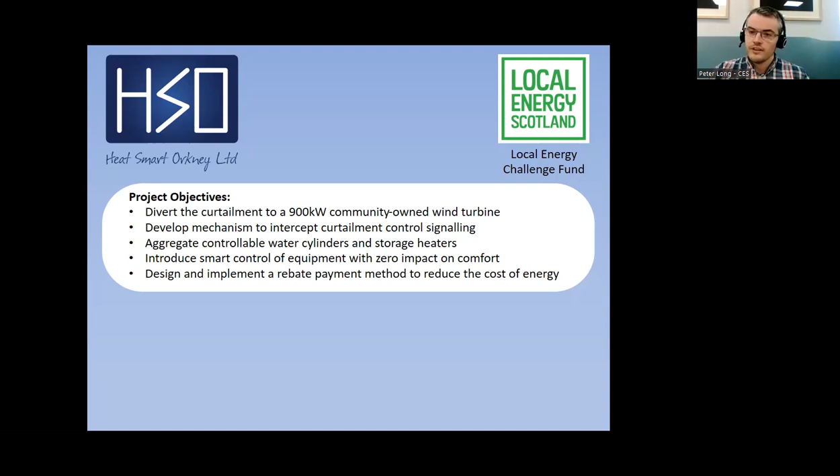So this was upgrading people's hot water cylinders to high efficiency Megaflo cylinders and putting in Dimplex Quantum high retention storage heaters as their secondary heating. We could charge these, with the idea being that the property's primary heating system didn't need to work so much. But since we were forcing these electrical resistive loads to turn on, the participants were compensated for the electricity forced into the property, rebated by first 10% and then up to 20%.

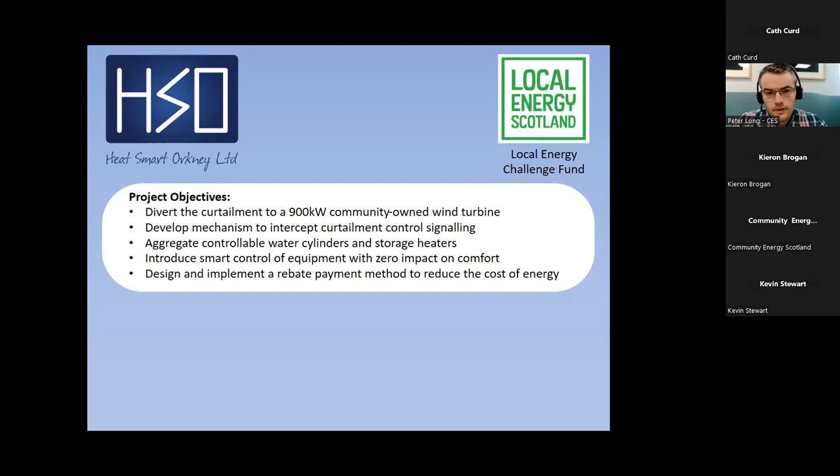The area I was mentioning is part of Orkney's active network management system, which was implemented in 2009 to allow more renewable energy to be connected to a very constrained grid. When there's not enough space on the grid, certain turbines in certain areas start getting turned off. So we could intercept those control signals, to start turning turbines off and turn on electrical devices at that time.

The project suffered from issues like internet connections - you need a very good, reliable internet connection to have optimum availability, so that was one issue. Another one was the equipment used to send control signals to each of our 70-odd properties was relatively new, bespoke equipment that had its own reliability issues, but there was certainly enough successful operation to prove the business model.

What I would say about the Heat Smart Orkney project, even though I would class it as a success, it ran for 2 years funded, but it was only possible through very generous capital funding from the Scottish government. So it would be hard to replicate, and you could argue it's quite a niche thing for Orkney-specific problems with grid constraints. But I do feel there's potential for it to be rolled out in the future when communications equipment and internet can be more reliable, and aspects of it are certainly replicable in other areas where we start seeing more constrained areas in the grid across the country. I do hope we manage to set this model back up again in Orkney in the future - I think it had great potential and serviced the community groups we were working with quite well.

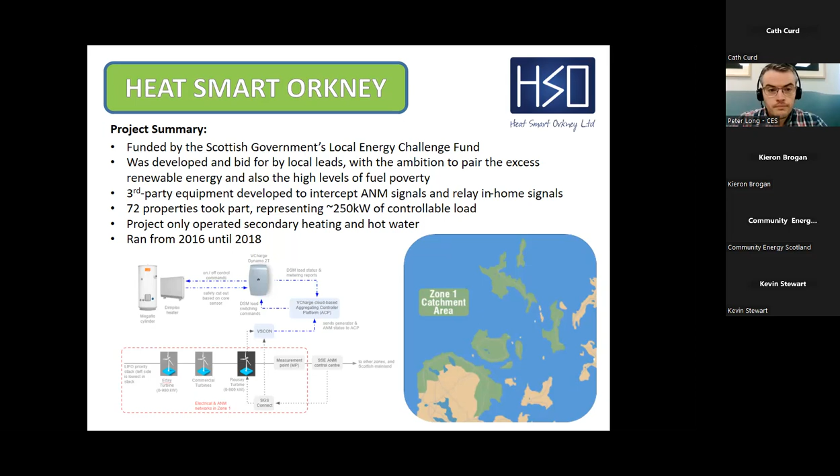I've already gone through some of the lessons learned, but one of the links that Cath's going to forward on to everybody is the final report of the project, and that's already available. If you just look up Heat Smart Orkney final report, you'll find it very quickly, and that provides a good explanation of the background behind the project, the rollout of the project, and the results and the lessons learned. So I would recommend, if you have any interest in similar community energy projects, it would definitely be worth a read.

So the Heat Smart Orkney project fed into the SMILE project, which was European funding. This time we worked with a large number of European partners to look at technical and non-technical innovation barriers and solutions. But here we were building upon the Heat Smart Orkney project I just described, where Heat Smart Orkney was looking at relatively simple resistive heating, whereas SMILE was trying to incorporate wet heating systems.

So air source heat pumps were our primary source of heating and hot water. And this was certainly a large learning curve locally for us at CES.

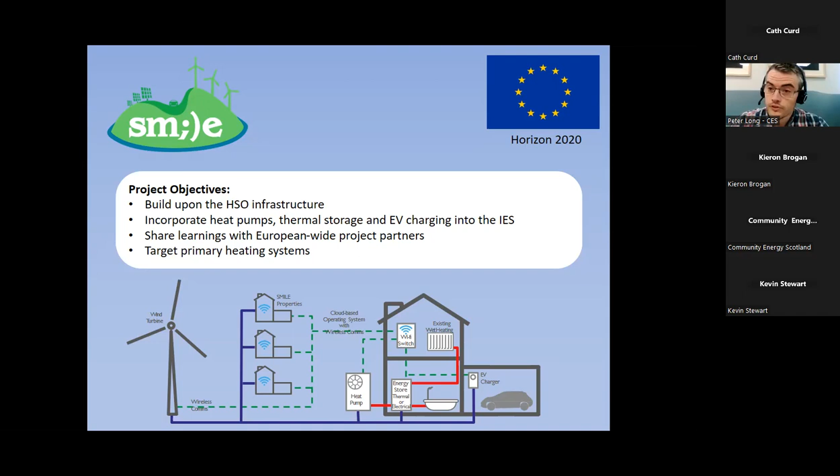I don't want to get too technical, and Cath tried her best to remind me that I shouldn't be assuming too much about everybody's technical experience, and I'm certainly no engineer, plumber or electrician.

So here I've just put in some pictures from some of the equipment that we installed, and we used the Daikin high temperature Altherma heat pump, because our technical partners had to pick a heat pump, and that's the heat pump we're integrating with.

They only had time and resource to onboard a single model, so it did restrict some of our flexibility in the properties we could enroll into the project, as the heat pumps were rated 11, 14, and 16 kilowatts, where a lot of properties in Orkney, even as cold and windy as it is here, some of them may only need a 6 kilowatt heat pump, and it would have been irresponsible to have put in such an oversized heat pump. So it was a bit limiting.

But yeah, we also installed lithium-ion batteries, again new hot water cylinders, and also paired with SunAmp just outside Edinburgh with their phase change material heat batteries, which are kind of a success story for Scotland, bringing energy efficiencies and new phase change material heat batteries to the market, which do offer higher energy densities and higher efficiencies, lower heat loss.

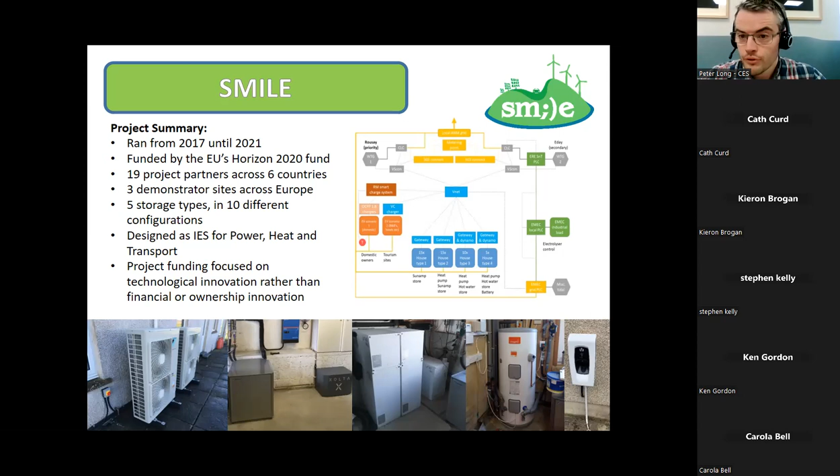So this was certainly a large impetus for CES to try and upskill quickly, and a lot of our learnings came from problem solving there. But yeah, lots of successes.

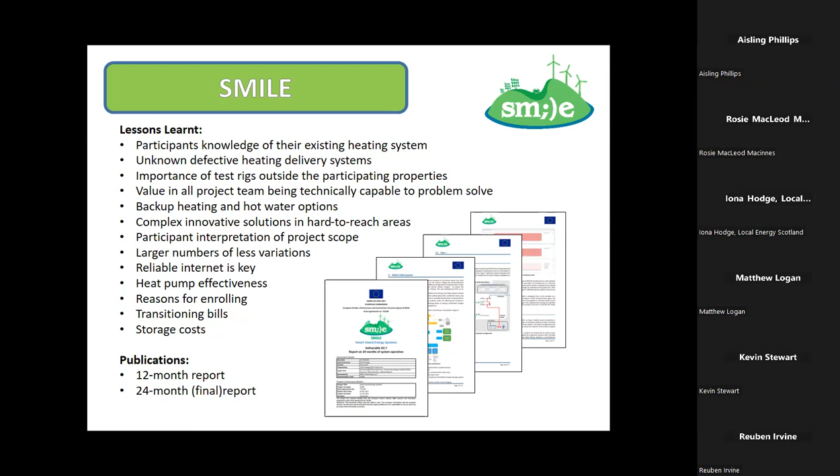But again, some of the lessons learned from the project were, again, just the role of internet, and just how, when you're working with high resolution data, down to secondly resolution data, having your internet down for half a day can make big impacts in terms of data collection, and being able to send control signals to the property to try and turn on these electrical appliances to ease the local grid.

But yeah, I would say we underestimated how much time and resources was required just on the activity of helping these homeowners transition to a heat pump based heating system, just in part down to the changing in their bills, and also how to use the heat pumps differently.

This was a project that did rely on a high level of disruption for the homeowner. We were putting a lot of equipment into the property, the idea being that we were retrofitting this innovative setup into multiple standard houses, but you can never be sure how that system was going to interact with that property's existing system. And sometimes when you were doing this, you identified a fault in the system's heating circuit, or circulating pumps, or thermostats, and it did grey the area.

What was the responsibility of the project and what was the responsibility of the homeowner? We certainly did our very best to support as much as possible, but that was an aspect I would say we probably weren't prepared for enough - to be comfortable drawing that line more clearly. We realized we were coming with a competitive offer of a free heat pump, but at the same point you're introducing a lot of disruption to the homeowner. We want to be as sympathetic to that as possible.

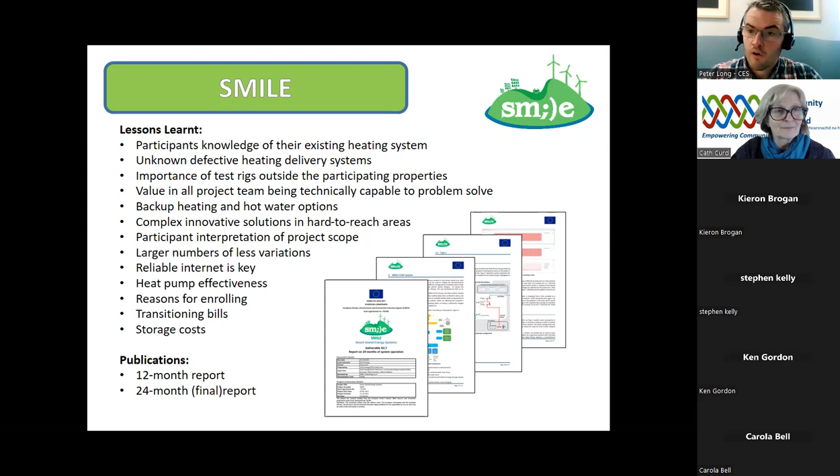Yeah, the other lessons learned, and I guess a significant problem for implementing a project like SMILE, is that it focused on storage in order to be able to implement some of the activities, and then who pays for that. Cath's going to send on links for the final reports, and I would say there's lots of really helpful data in that, and all these lessons learned are reported in detail within the report.

Thank you, Peter. Before you go on, could I just ask - there's a couple of people asking questions relevant to what you've just been saying. That is the performance of the air source heat pumps, not only this far north in Orkney, but also how do they survive in a marine environment, please? Oh great, okay thanks, yeah I should have said that. Thank you for interjecting there.

So in terms of the performance, we didn't have any problems with the performance of any of these heat pumps. They were rated quite high for heat pumps, and they are the high temperature models, so they are capable of delivering like 80-degree water, even though the efficiency does drop noticeably after like 60-65 degrees. So you don't want to be setting your heat pump that high, but where it was required, it was certainly capable of it. Most of our heat pumps were set at a flow temperature of like 50-55 degrees, I think some maybe at 60, and so they were certainly capable of keeping the homes warm, and at that power rating they were able to do it quickly.

The only problems we did find with some of our solutions is where we've introduced a significant amount of energy storage in the central heating loop - there were some scenarios where the conflict between hot water priority was taking too long, and then the house is starting to get cold. So we just had to have a lot of discussions with the homeowners about when their hot water is being charged and when their house is being heated. But yeah, the heat pumps themselves we didn't have any problems with.

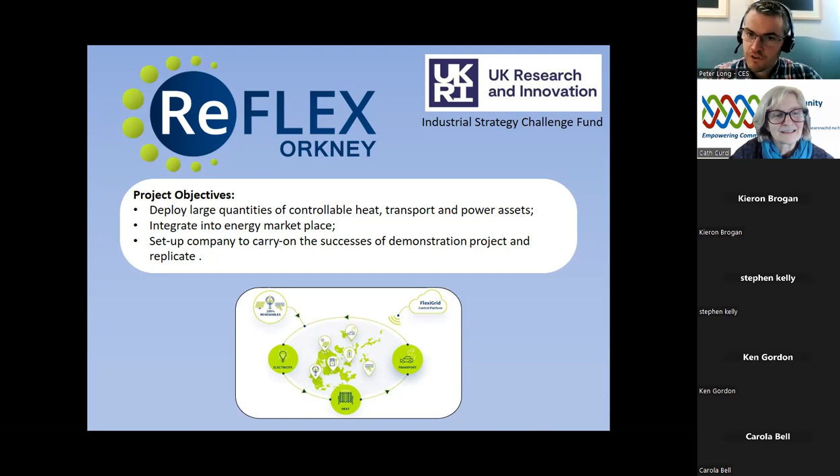I would just quickly talk about the ReFLEX project, which is one that CES came into to help work with the local communities that we work with, and also bring in some of our learnings from Heat Smart Orkney and SMILE.

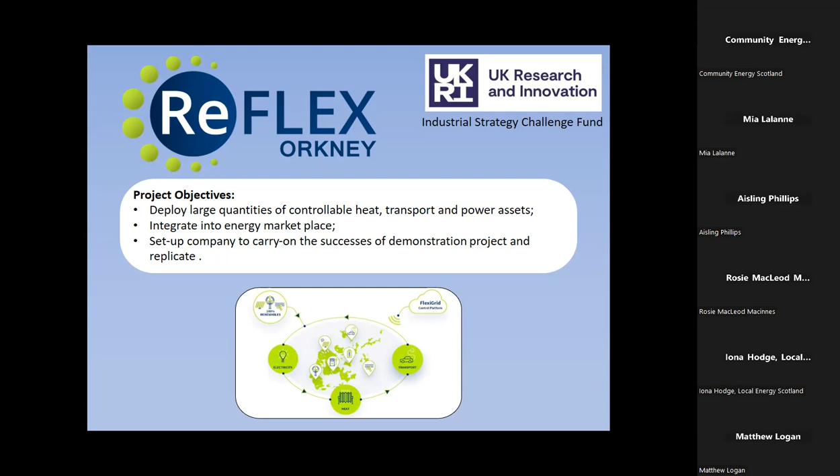Unfortunately, there wasn't a heating offer during the project due to some regulatory issues. But this was trying to build upon those learnings, but tie it to the market and find a way that a property could get low carbon heating offers that didn't require large capital funding - for the homeowner to have access to low carbon heat, low carbon power, low carbon transport, and effectively pay it off over a 5-year period.

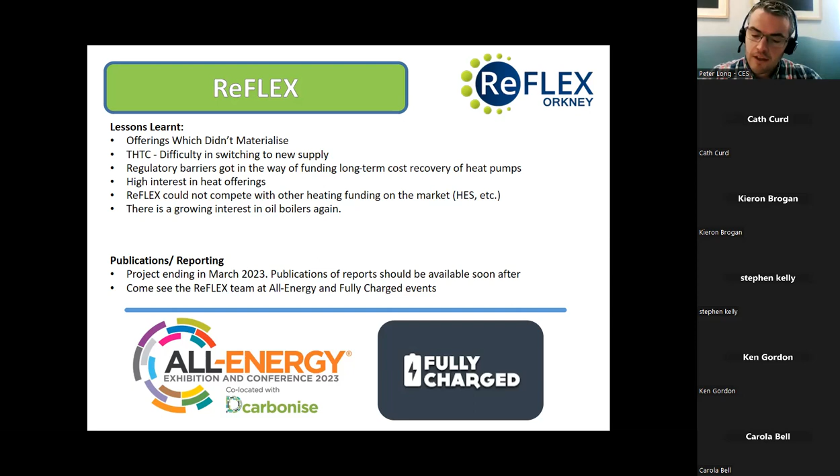It was the barriers that prevented that 5-year tie-in that was the problem. But they're still working on this, and we hope there will be something later this year, because the main thing is just making sure that anybody who wants to can have access to these transitional technologies. Home Energy Scotland, for example, are doing a great job with their funding. But ReFLEX is a project that set up a company, and that company is trying to do it without funding. So hopefully we'll see some progress in that.

Unfortunately, there's no publicly available reports just yet, but the project is ending relatively soon, and we hope publicly available reports will be available with the plethora of learnings. But if anybody on this webinar is going to be at All Energy or any of the fully charged events this year, ReFLEX Orkney will be available for discussions and presentations.

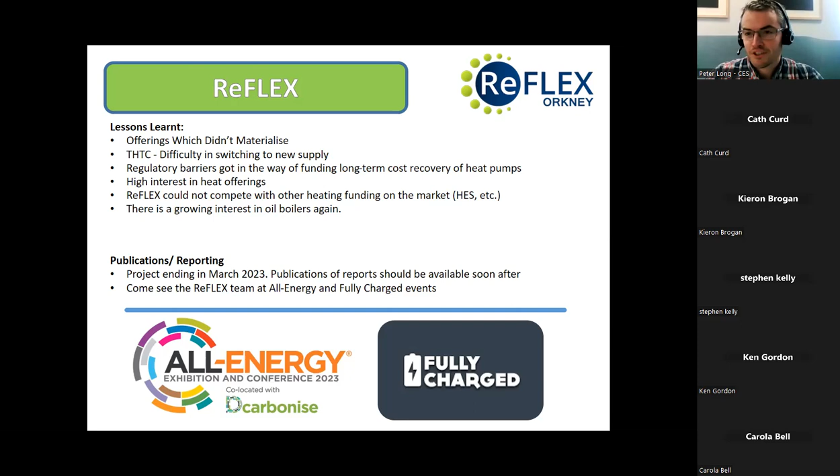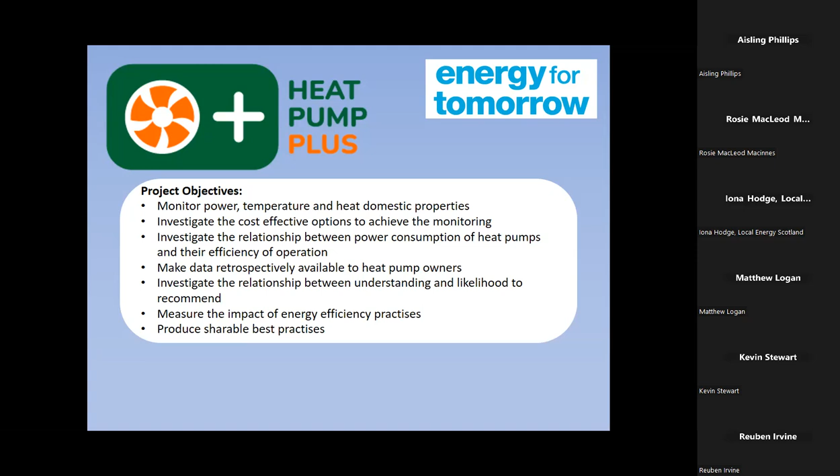So yeah, I've already mentioned some of the learnings that have brought us to the Heat Pump Plus project. It's a modestly sized project in comparison to the previous projects. It's funded by Energy for Tomorrow, which is a part of the Centrica Group.

What we were hoping to do is really nail down the energy efficiency per property, whereas our previous projects were focusing on how demand side, like load controlled heating and hot water in properties, can ease the grid. So that was the focus of those projects, even though there was a secondary focus on making sure the homeowners were as supported as possible.

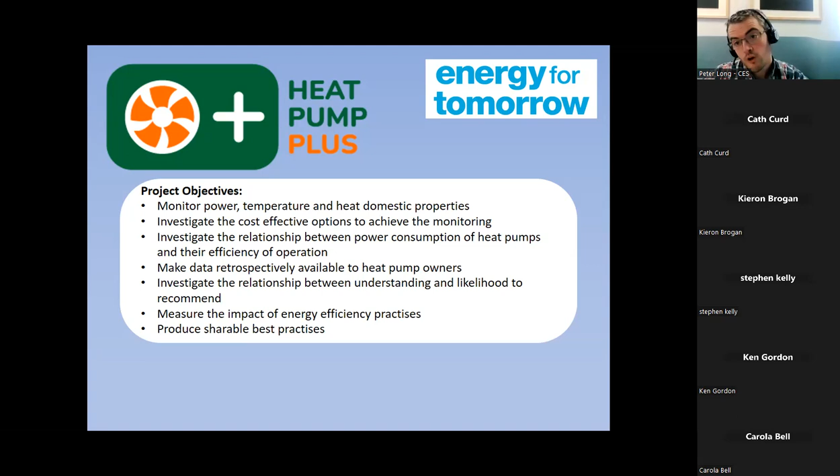But Heat Pump Plus is not looking at innovation. We're just trying to get back to our bread and butter of supporting individuals. So here what we were trying to do is look at power monitoring, temperature monitoring, heat from heat pumps, and really nail down into what it takes to make heat pumps as efficient as possible. And at the end of the project, we want to hopefully be able to produce not a Bible, but a document that is shareable, publicly available, that is just our findings on what it takes to make heat pumps as efficient as possible for homeowners or building managers, community groups.

So yeah, our project started at the end of 2021, and since then we've onboarded, we've had roughly 80 properties approach us for assistance, and we've got energy monitoring in roughly 40 of those, a different suite of monitors. So we've tried to make those monitors as cost effective as possible. We don't want to do this work with high, expensive equipment that's just unfeasible for any homeowner to take on themselves after as a replication activity.

Once we have the initial talk with our participants, we also ask them to complete a series of questions that's trying to gauge their perception of their heat pump, and the idea that the amount of faith you have in your heat pump is in part an emotional relationship you have with your heat pump, and this could be based on the amount of understanding you have in your heat pump. I'll touch on that a little bit later.

But since the launch of the project, Nesta, Hildebrand, and the Sustainable Energy Authority of Ireland have all approached us to discuss knowledge sharing, lessons learned, where we could complement each other. So that was quite exciting. And what we found out, there is a lot of organizations working in the space, and some people already in this meeting today are also working in this space. And I do hope we're not stepping on each other's toes or reinventing the wheel too many times.

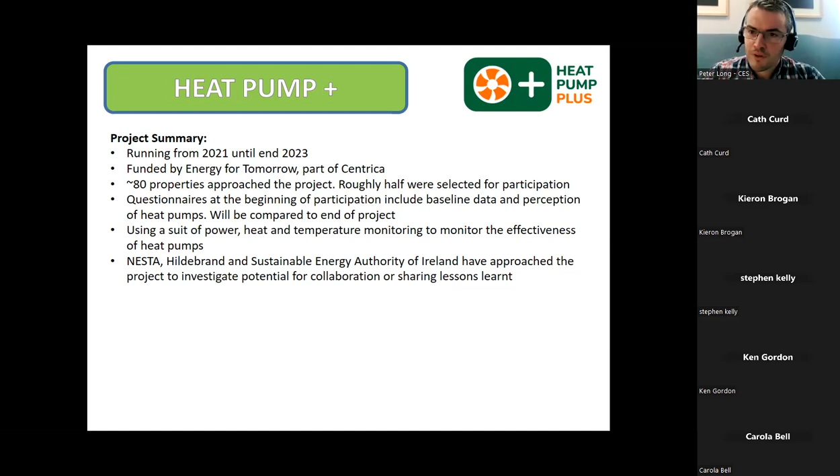But yeah, sorry if I'm going a bit rambling now, just trying to fit everything in. In some of our initial questionnaires, we did ask people, what heat pump do you have, the manufacturer, for example, and even we were surprised just how many, even in Orkney, in our 80 participants, just the amount of different heat pumps there are. And that did give us an insight of how difficult this project is going to be able to provide advice on.

This suite of heat pumps, and there's just not the ability to go through the manuals of so many models. So as much as we can be able to provide that one-to-one relationship, but also find generic steps that anybody could take.

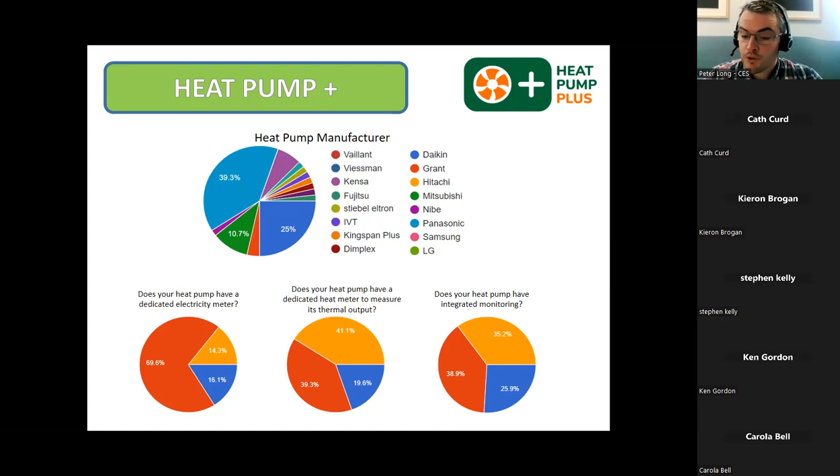And the pie charts on the bottom were trying to fill in our knowledge of, well, what data do people have available before we came along? Can they see how much power their heat pump's using? Can they see what heat is the heat pump producing? And yeah, there's a lot of gaps there, and I guess that's the reason why these people are approaching us, because they don't currently have access to the data themselves.

So I guess it's just a question to the group. It's not a mandatory question, but feel free to type in an answer or raise your hand. If you have a heat pump, do you feel you have access to enough data from it to operate it at its highest efficiency?

And from the data that we've got from our participants, generally the answer is no.

Peter, while folk are having a think about that and possibly typing information into the chat, we've got a question from Kevin asking about, just to go back a couple of steps to the finished projects, whether we know what happened overall with people's energy bills, and whether they dropped due to spending less on oil and not using as much electricity.

Yeah, so I would say on average we reached cost parity. There was some where they noticed an energy saving, and some where they experienced a cost increase. I think we always thought it would be hard to compete with oil, but we got half of our installations done before the lockdown happened, and the other half afterwards. It was rough - during some of that period, the price of oil dropped significantly. It did waver quite a lot.

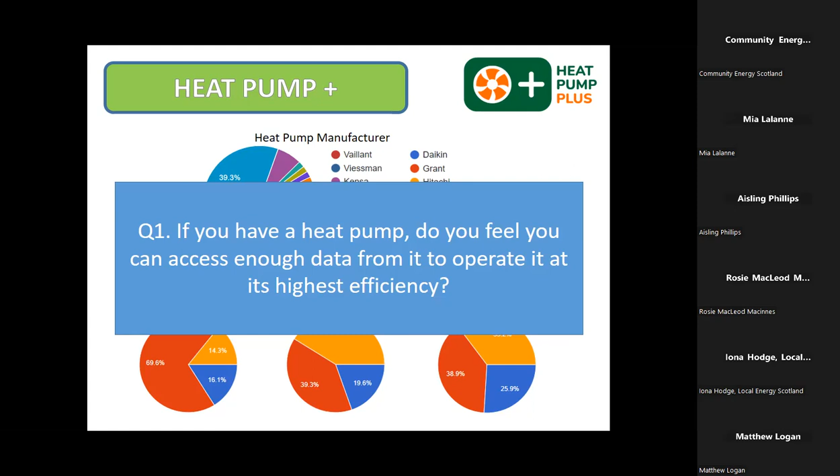Yeah, that's fine. Sorry, it was just an answer to the question, really. A heat pump - do you feel you can access enough data from it to operate it at its highest efficiency? Well, I can get all the data out of mine that I need, but I don't need it to control it. It just does it itself. The heat pump controls speak to each room - it has a thermostat in each room, and it turns on the underfloor heating as and when required. And it's just astonishing to get a coefficient of performance, a seasonal coefficient of performance, or seasonal performance factor as we prefer to call it nowadays, because there's no fiddle factors in there.

It just is what it says on the tin, you know. And I think it really would be very interesting for your next project if you could look at this, because that is the basis of what people are having to pay, how efficient their systems are going to be. And certainly outside the meeting, if you want to have a chat about this, I'm also a council member of the Ground Source Heat Pump Association, so I have a vested interest in putting the case for ground source, because it's much overlooked. The curious case is that a ground source heat pump is actually less noisy than an air source, because there's no fans or moving parts or anything.

But you need the ground, so you need to drill a hole. But the hole I drilled in my back garden isn't there just for me. It's there for my kids, my grandkids, and for everybody. It's there forever. This is a resource that we should really be looking at over a long period of time and covering it that way.

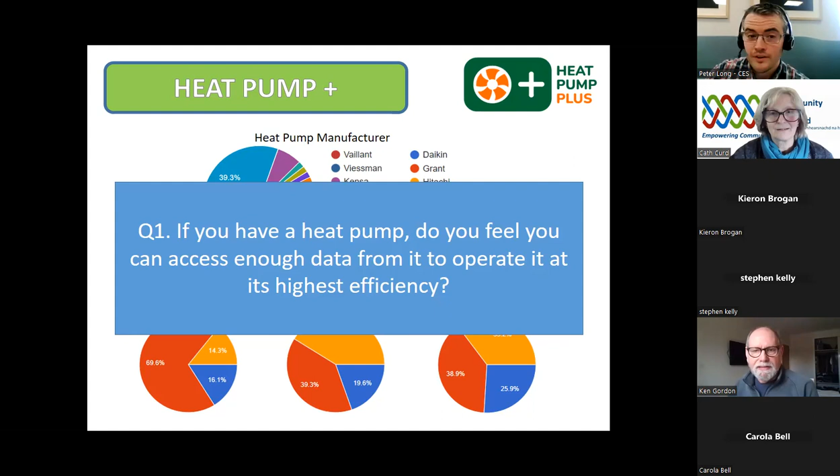Thank you. I'll just pass on from this, and this is just some of the other responses we put out.

So this is like, how would you rate knowledge and understanding of how to operate the heat pump? I would say most were middle to less understanding. The heat pump system meets my heating needs - I would say the majority average or positive by a long degree. So the heat pumps are proven to be very, very effective.

Perception of running costs - mixed bag there, but this is perception. What the project is trying to do is to give people access to the data, so we'll see how that goes at the end of the project. We'll ask them the same questions. And in terms of the handover that people had from their installers, I would say the majority average to good handover, and then some feeling that they were not provided the handover.

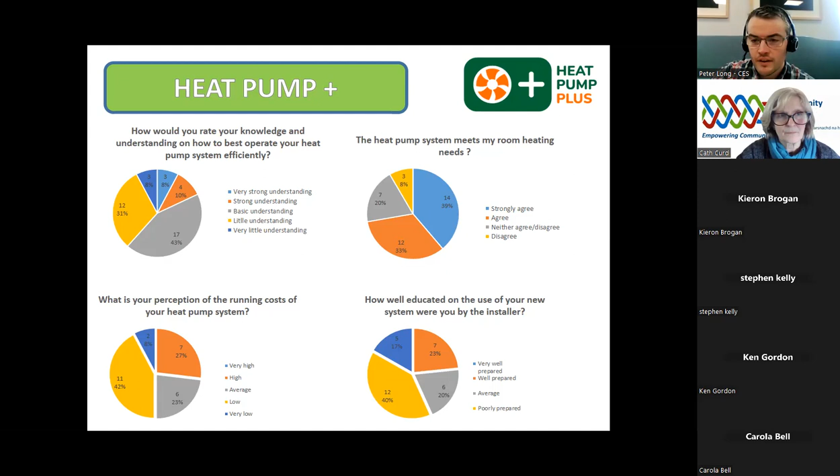I'll just pass this, and this is just some of the monitoring equipment we are using. We've got some temperature data loggers, which just log the temperature every 30 minutes. They're very cost effective, so you can have one spaced around the room, around the property. The only disadvantage is you have to physically recover the units to get the data.

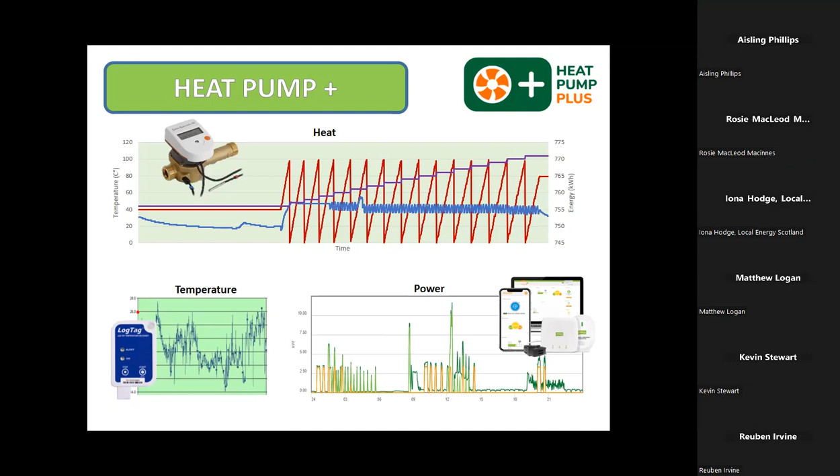The power monitoring equipment we've used for the last 4 or 5 years is the Efergy-based equipment, and it's very good cost effective stuff. But the problem we have is that Efergy appear to be leaving the market, and there's not much in the way of replacements.

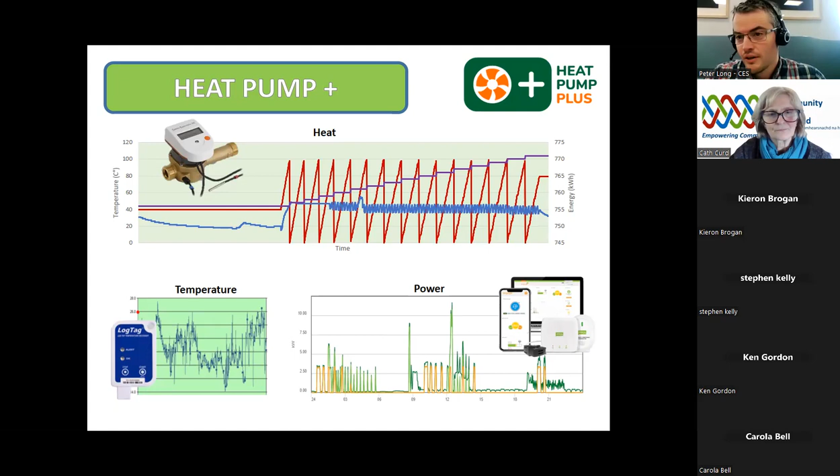Since we don't really have much time for more details on this, if you have any understanding of other possible CT clamp-based energy monitors, we'd be very interested to hear your experience while we're still investigating alternatives. And as mentioned, to address some of the shortcomings, we've put in a number of heat meters to actually get that flow rate and flow and return temperature in order to map the coefficient of performance and try to take steps to increase it.

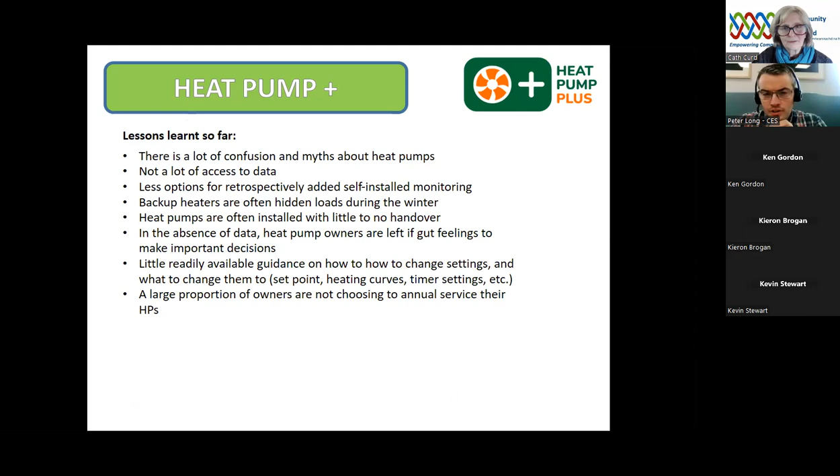So some of the lessons learned - very much, as you can imagine, there's still a lot of confusion and myths out there about heat pumps. There's a lot of people out there that don't have access to the data they need to keep an eye on their heat pumps. And heat pumps and backup heaters and immersion elements can very much be vampire loads - they could be very invisible and you might not be aware of what they're doing.

And that will change with the more modern heat pumps, but we hope to be able to make that data a lot more available. It's quite interesting, the assumptions homeowners are making, and then you show them the data and how their assumptions are incorrect. But that is the first step.

And yes, there's still little readily available guidance out there of how to change the settings of your heat pump and what to change them to. So we hope to be able to do something about that by the end of the project.

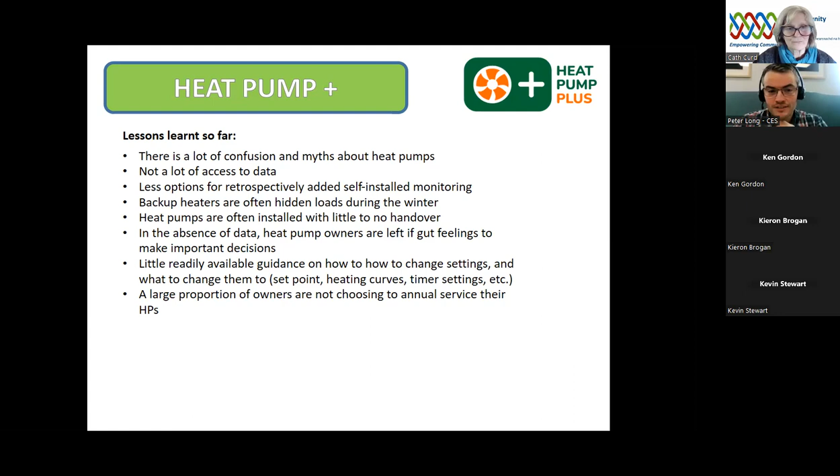I did want to put in some quick guides of some of the stuff we found in terms of heat pump guidance and troubleshooting kind of things, but very conscious of the time, I can't really afford to go through a lot of these. But it will be part of the recording, it will be part of our outputs, and if you have the capacity, maybe just take a screenshot.

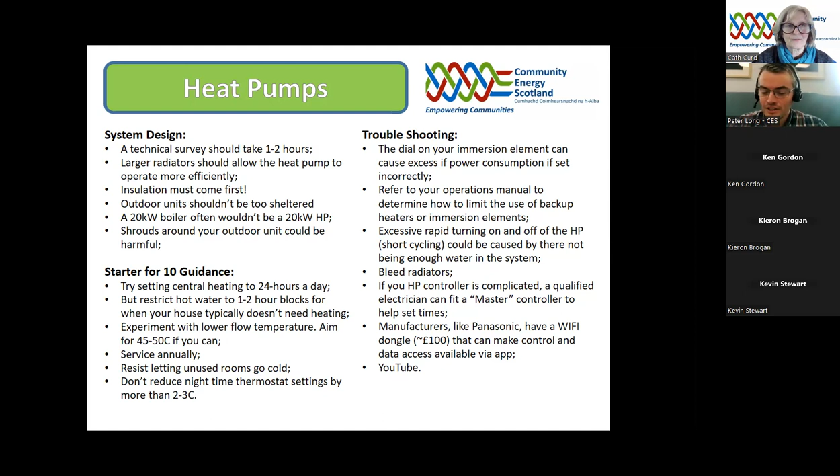I just wanted to follow up, and I would recommend, this is more in the domestic setting, if you have any interest in making changes to your property or for people in your community that you represent, Warmworks and Home Energy Scotland are definitely a must. They effectively operate as a one-stop shop and offer great support, and we have great ties with them locally, and they help feed into our projects.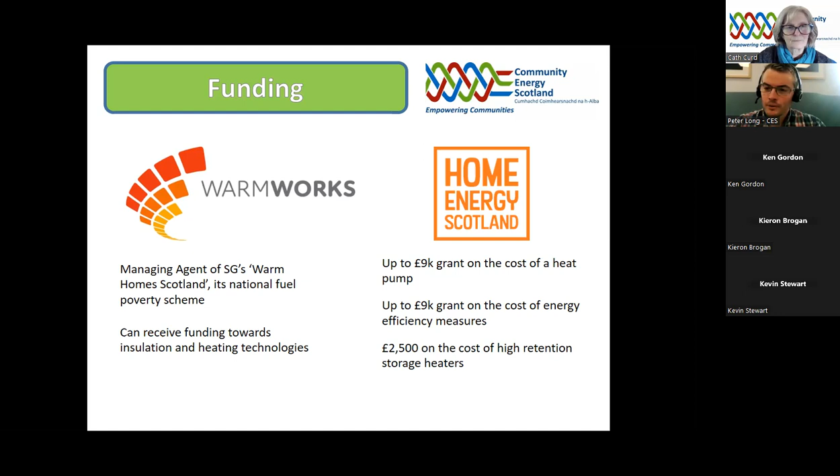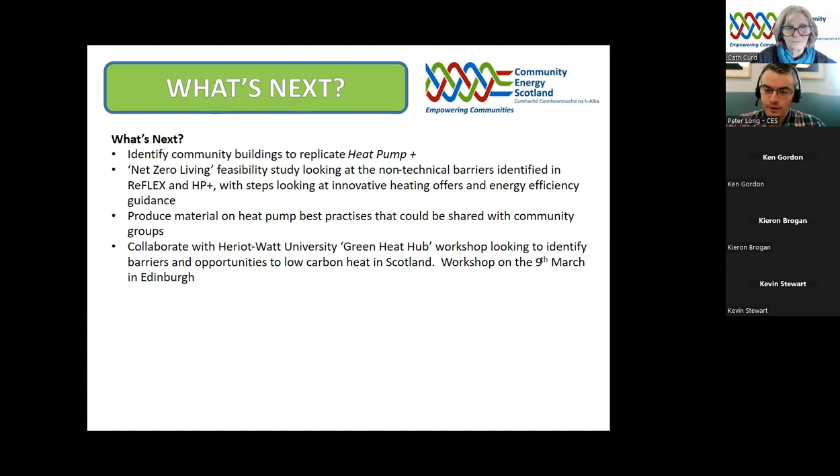We are still continuing our journey in the low carbon heating space, and we've got a number of projects coming up that are going to feed into Heat Pump Plus and also learn from Heat Pump Plus. It'll all just help us provide a better service, and that's what we want to get to.